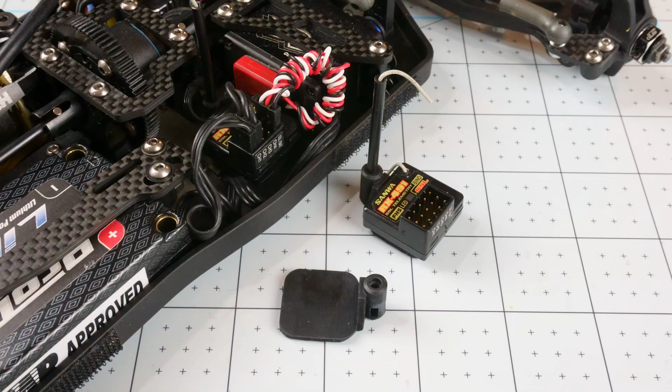Today we're going to talk about 3D printing and how to design something like this, which is a receiver mount and an antenna tube holder.

The reason I thought about building this for my cars is the B74.1 and the B74 both don't come with an antenna tube holder. The new Sanwa receivers have an antenna, and some of the older ones like this SR410 from Spektrum also just have a long antenna that you need to mount somewhere in your car. So usually what I end up doing is just wrapping it up and putting it with the other wires in the car and calling it good.

This time I wanted to come up with something that would look cool, and I remembered a few years back when I had a D413, a Hot Bodies D413, and that car came with something similar to this. I always liked that because it gave you options on where you could put your receiver - pretty much anywhere in the car.

So I thought, why not make one of these for use on my current cars also, because I have these receivers that require a short antenna tube. Let's jump into Blender and I'll show you how to design something like this part using Blender's interface. Then after that, we'll jump into Chitubox and show you how to design the supports for printing.

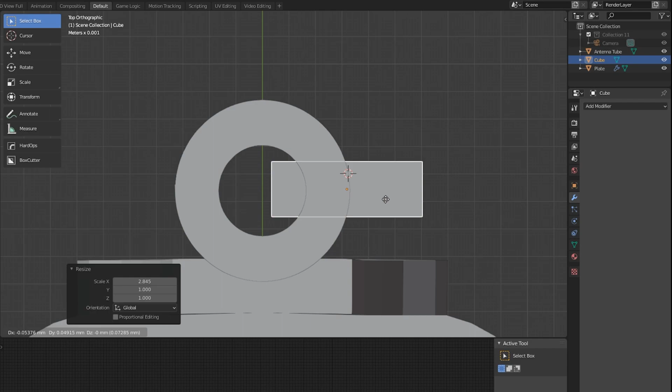Let's go ahead and create a cube, that's going to be a 2x2 millimeter cube. I'm going to scale it up a little bit so it's taller, and we'll have this right about here, just like that. So in top view, scale it a little more so that it cuts all the way through the tube. What this is going to be is like a template to cut into our tube here.

So rename this to cut, and in order to cut this out, I'm going to add a modifier onto our antenna tube called Boolean, and select my cut, and that's it. If I go into local view by hitting the slash on the numpad, you can see that the antenna tube now has a little cut for where the wire can go. Once I like that, I can click on apply in this drop down, and then delete this cube by hitting the X key and hitting enter.

Alright, so I think the only other thing I want to do is put a little cap on the bottom of this, so that the antenna tube has something to rest on if it goes all the way down, instead of hitting the chassis, for example.

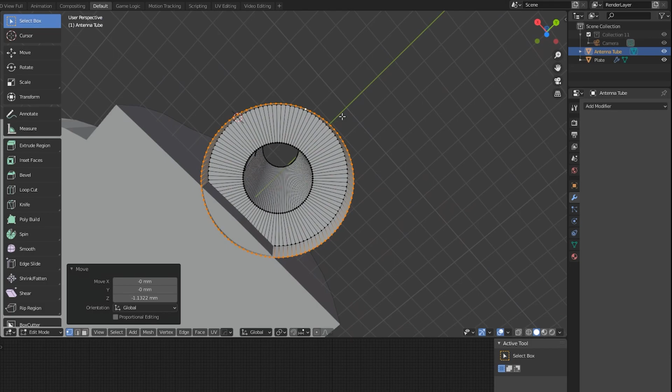So what I'm going to do is edge select this ring by holding Alt and Shift and right clicking on that edge, and that just selected that edge alone. I'm going to extrude that down, and make sure that it's not pointing out there, and then I'm just going to hit F to create faces on it, and do the same thing for the inside.

So Alt Shift right click on that edge loop, it may not let me do that. There we go, right there, perfect. And then just hit F so we got a face in there too. Okay.

Cool. And on the top, I'm going to do a loop cut here by doing Control R again and go into face mode, and I'm just going to raise this up a little bit so it's got a little bit of a beveled edge on the top of it.

Okay, so let's take care of this mirroring. Go ahead and apply that mirroring and go into top view, go into face mode, and I'm just going to select these faces and hit the X key to delete them, and I want to delete faces. And then we have an open part now on our model, which we don't want because 3D printing requires us to have an airtight model. So I'm going to select these edges and hit F to create faces.

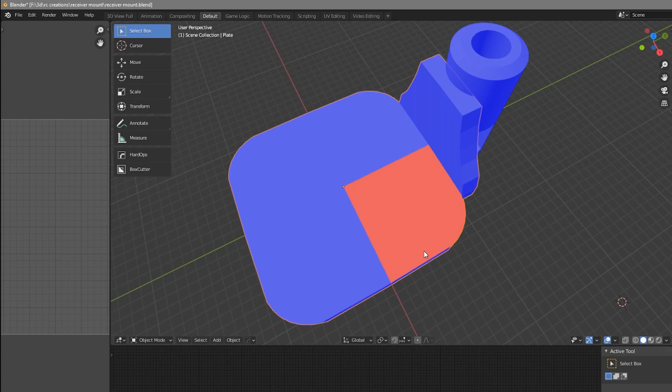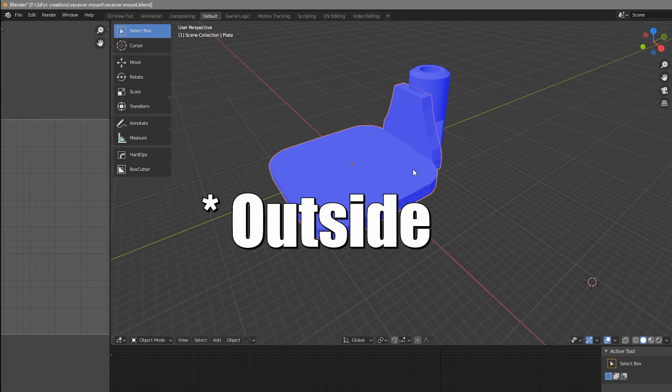So you can see here I've got most of my model in blue, which is good, but then I have this face here that's in red. So I want to flip that so that it's working correctly. So in order to do that, I can just go into edit mode, select all by double tapping A and then holding down Control and typing N, and that recalculates the face normals to the direction that they want. So now that that's done, I think I'm ready to export.

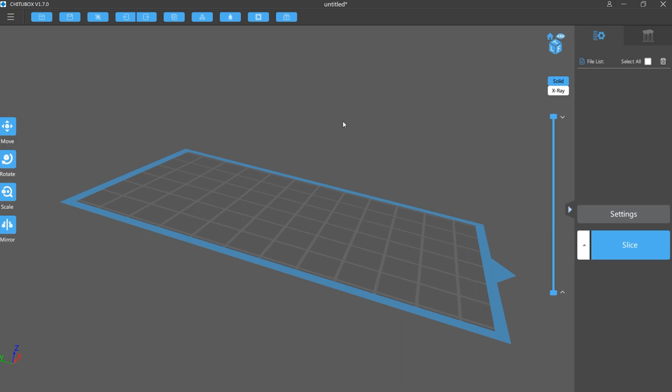I'm going to select both my objects again and then do File, Export, STL, Receiver Mount STL. Make sure that you have selection only turned on because I'm only exporting these two objects. And also keep the scale as default of 1. And then click Export. Okay, so now that it's exported, we can go ahead and load up the 3D printing software and show you how that works. Okay, so I use a tool called Chitubox for printing on my printer.

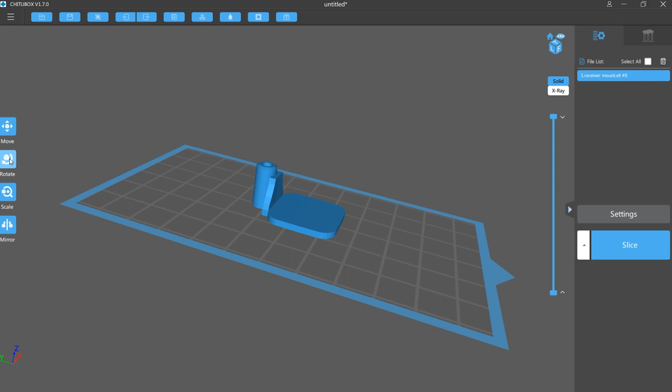And I'm going to click on the open file here and just select my receiver mount, and it's going to drop it onto the grid here, which represents the build plate of the printer. And one thing I like to do is rotate my object a little bit so that it's not printing directly on the build plate, which makes it hard to peel off the build plate. So I'm going to rotate this a little bit like that. And then I'm going to build some supports for it. And you see it moved up the Z height to 4 millimeters, which is fine.

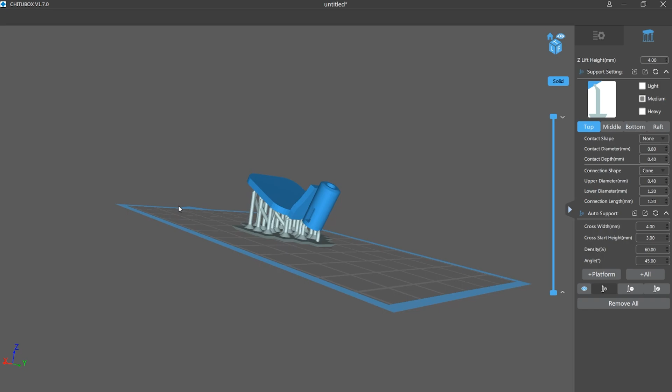And then I'm going to create a platform of supports for it. And so this is how the object is going to print on the printer. And I'm liking how this looks. Some people spend a lot of time creating supports, and this is kind of an art to create supports, but for this simple piece we're just gonna go ahead and let it automatically create them.

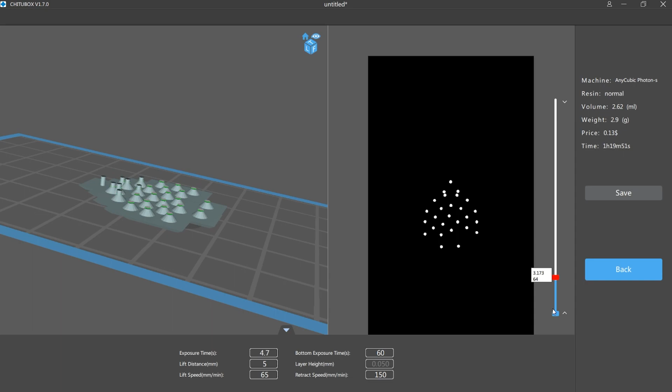So once you're happy with the supports, go back over to the settings and then just click slice, and then if you scroll through here you can see the printer is going to start with the build plate at the top, so it's going to start with this and just slowly build out the object like that until it's done. So I'm going to save this onto my flash drive and then go over to my printer and start printing it out.

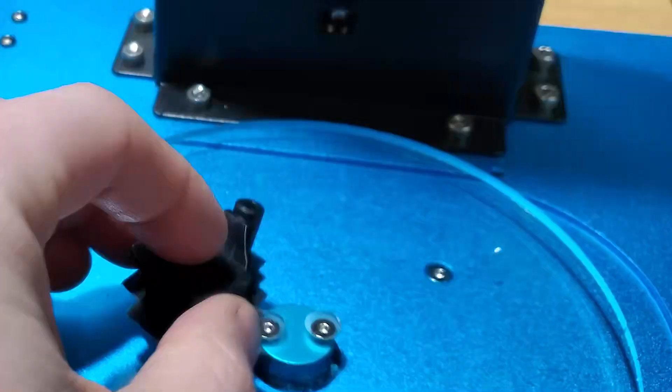With resin printing, there's some precautions that you have to take. For example, you want to always wear rubber gloves whenever you're dealing with parts that are not cured. The resin will burn your hands and your skin. So you want to be careful and just use precaution, eye protection also. You want to cure your prints in some sort of UV light, or just put them out in the sun and make sure they cure thoroughly.

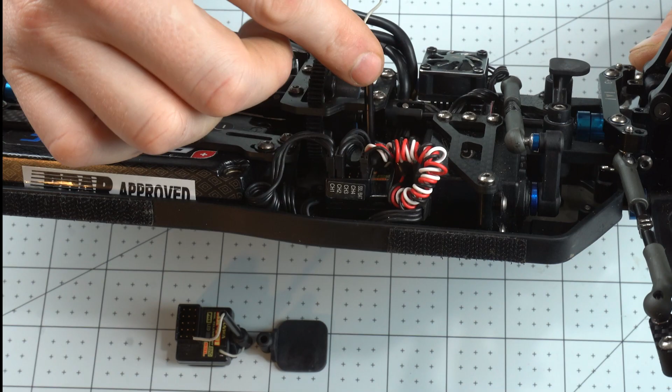And here you can see the part now is mounted up into my B74. It's kind of buried in here with some other wires. And what's nice is I can put my body on top of this and the antenna tube will just go sort of inside where the cab is. I probably could have lengthened the antenna tube a little bit, but I wasn't sure how much it would clear the body. So this is working pretty good, and I'm pretty happy with the result.